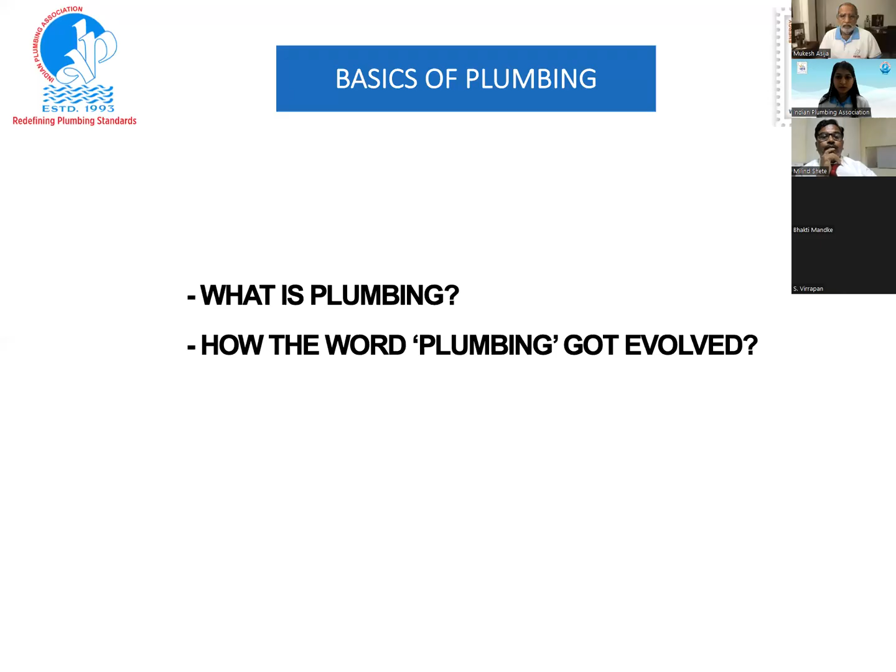One minute, let me just start this. Is my screen visible? No, Mukesh ji, not yet. Not yet. Okay, one minute. Is it visible? Yes, it's visible. Perfectly visible. Okay.

Young budding engineers, you know what is plumbing? A very simple definition of plumbing is it's a set of pipes and fixtures installed within a building. Please mind my words. Within a building, to supply the required quantum of water of desired quality at optimum pressure, and to collect the used water and convey this used water to a disposal point outside that building. This is what plumbing is. And the safety of the user is the essence of plumbing.

When you are supplying water through a plumbing system, it is for the safety of the user. And when you are conveying and or collecting the used water to a disposal point, again, the safety of the user is of prime importance, that it doesn't leave any kind of nuisance.

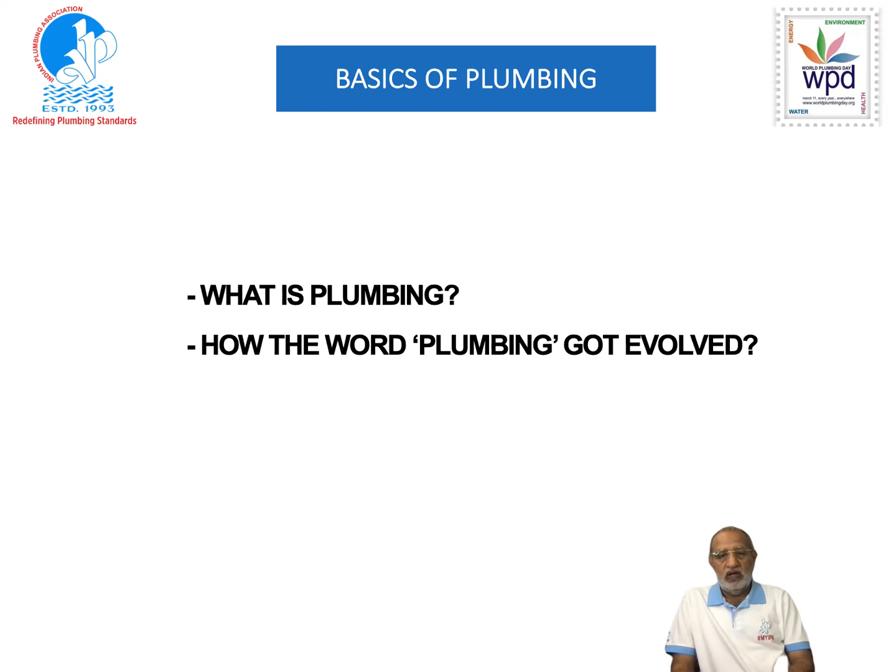Now the plumbing can be divided into two subdivisions. These are the logical subdivisions. One subdivision is water supply. We use that supplied water for the purpose for which it has been supplied. Once the water has been used, it has to be drained. So the second subdivision of plumbing is drainage. In between is the human being or any process which is using that water and converting it into leftover water, into used water.

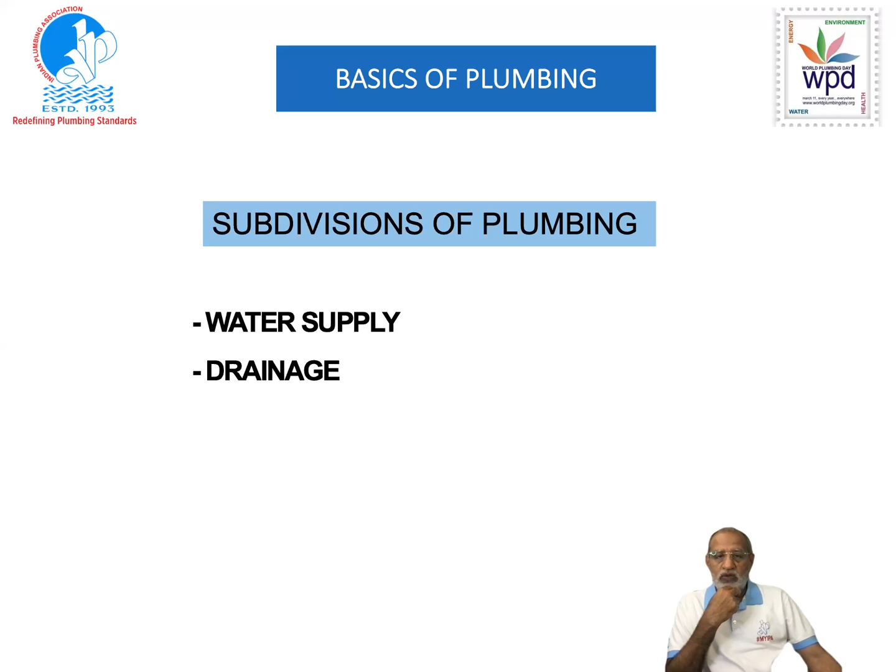Now, when we start with the first subdivision, water supply: how much water is to be supplied? Then, from where that water comes or may come. Perhaps the water we are getting is not fit for consumption directly, so you have to do the treatment. That water may not be available throughout the period of your usage from the source, so you have to store it. Then you have to provide a mechanism of distribution, and finally, a system of dispensing from where you draw the water and use it.

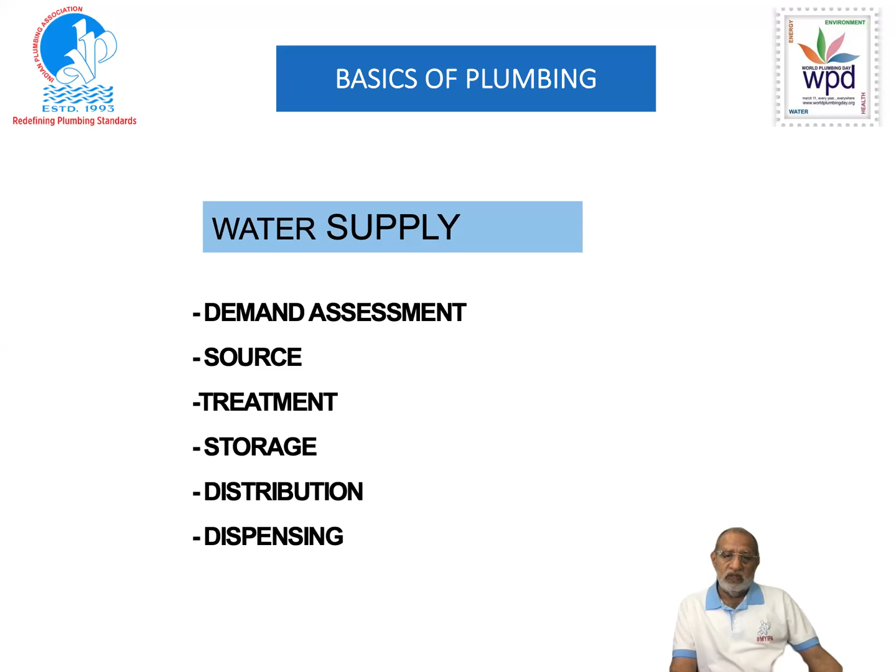Similarly, over a period of time, by collecting the data, these scales evolved, and many of these scales are now available in the codes. So when you assess the water, depending upon the purpose of that assessment, you refer to the codes where many of these scales are mentioned for different kinds of occupancies, or you try to understand the process, like the rice making example I have given, and then work out the consumption pattern. So this assessment of the demand is the first step.

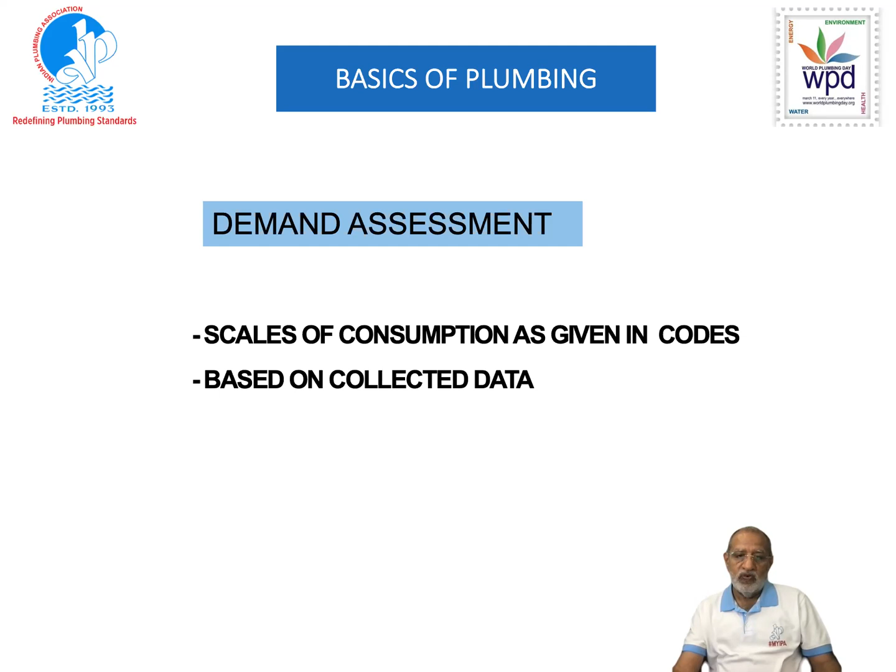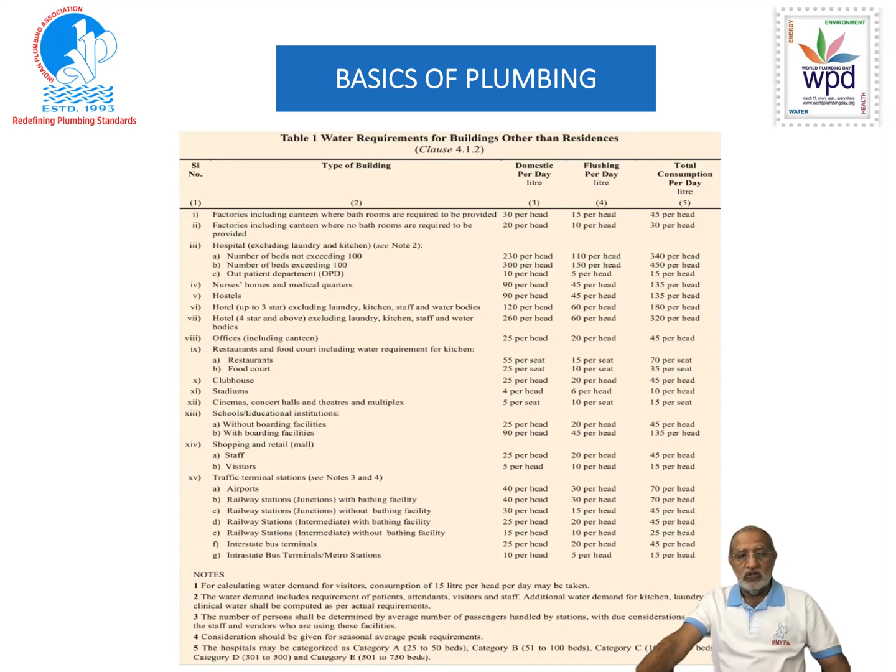Now, for example, when I say you have to refer to the codes, this is a page I have taken from the National Building Code, where different kinds of usages or types of buildings are mentioned, and the scales of consumption on the basis of per head, per resident, per bed, per seat are mentioned. So on this basis, when you know how many occupants or users would be in a building, you refer to these codes and work out the total expected demand. Once that demand is worked out, you provide for the other systems accordingly based on that assessment of the demand.

Demand you have assessed, but from where to get that water? For that, you must understand the hydrologic cycle or the water cycle. See, water on this earth is limited. Only thing is, it keeps on changing its form from one form to another form.

We have a lot of water bodies, including sea, from where the evaporation takes place. It gets condensed. Then there is a precipitation in form of water or in form of snow. That water, the precipitation in form of water, flows down through the naturally formed or man-made drainage systems or over the surface, and then comes back to a collection area, or it gets infiltrated into the ground depending upon the quality of the surface.

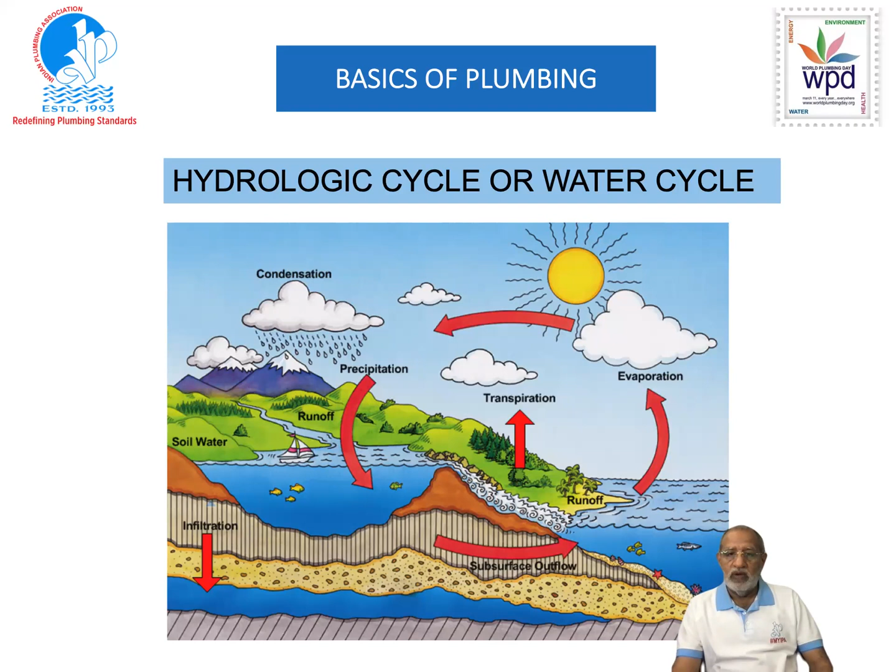Now coming to the sources of water, as you have seen in this hydrologic cycle, we have sources like rivers, lakes or ponds, and sea. These are classified as surface water sources because we can see the surface of that water. The other source of water is subsurface water, the water which has got infiltrated into the ground. So to draw that water, we have to drill the bore wells or the tube wells.

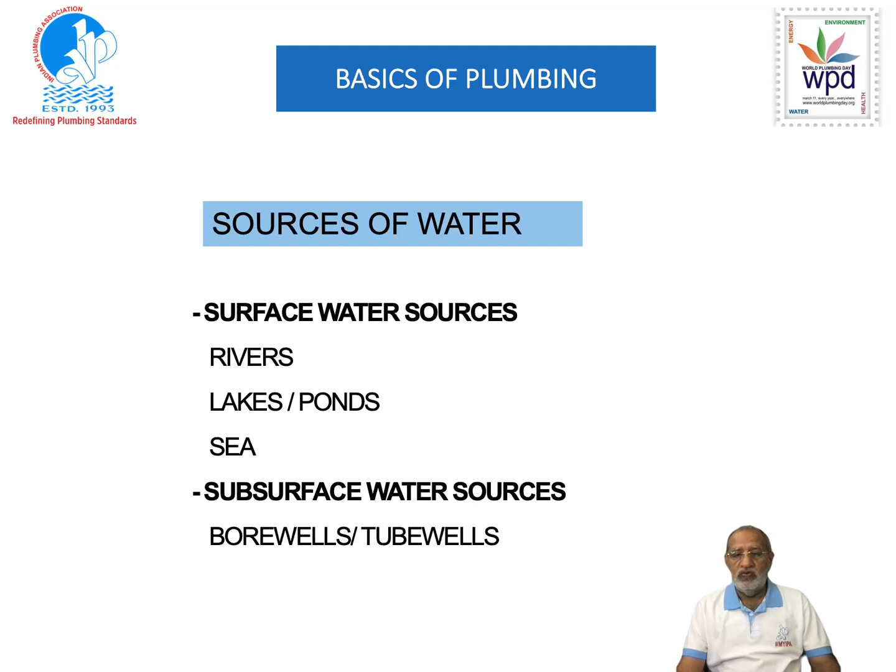So once we have identified our source, or if a source is available to us, depending upon the quality of that source, we have to treat that water. That water source may be pristine, perhaps you don't require any treatment. Like if you go up hills where habitation is very less and water is flowing crystal clear, you can drink it right from the river itself. It doesn't require any treatment.

But then, because of the habitation, increase in population, the way we use it, or because of other characteristics of the surface runoff which is going into our water sources, impurities do come into those rivers, lakes. So we have to treat that water before we use it.

Now these impurities are of three types. Physical impurities: water may be having floating waste material, can be just twigs, leaves, paper. It may be having physical impurities which have settled down at the bottom of your water source, or it is in a suspension form. It may be sand, it may be silt, or any other material.

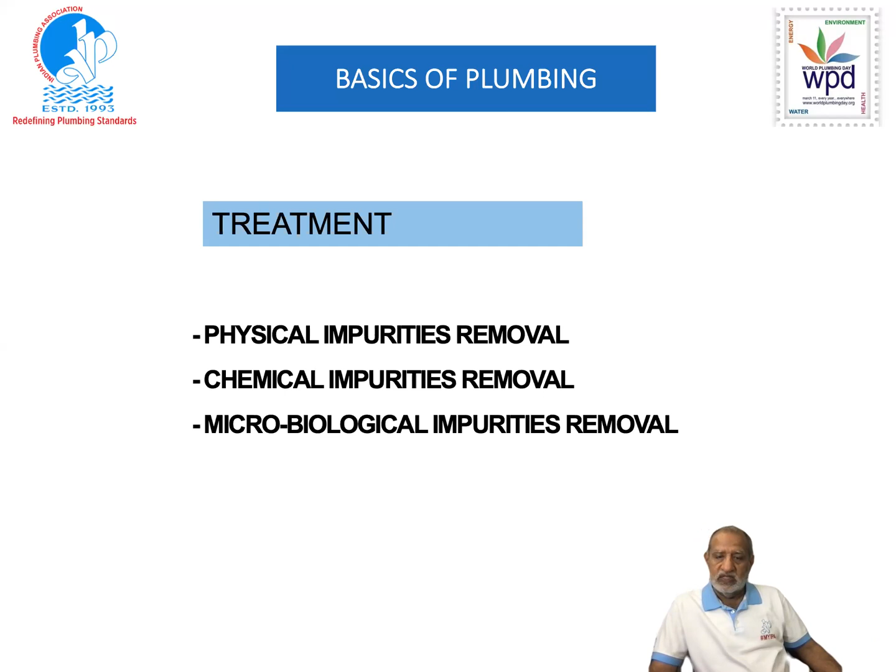So today let's have an overview of plumbing and the concepts of plumbing. So let's move to the next point. Once the water has been treated, most of the time it needs to be stored. Why is it to be stored?

If I am staying at a place and a river or a stream of water is flowing next to my house, and I know that it is a perennial river or stream, with water 365 days a year, I can draw water any time of the day, any day of the year from that stream. I need not store it. But this doesn't happen everywhere and for everyone.

When the source is limited and it is not close to us, water has to be conveyed to us through some other means, through pipes or tankers. So we have to store the water for the time when there is a disconnect between the source and our requirement. That is the purpose of storage. That storage can be underground, above ground, elevated, or a combination of all these, depending on how and from where we are getting the water.

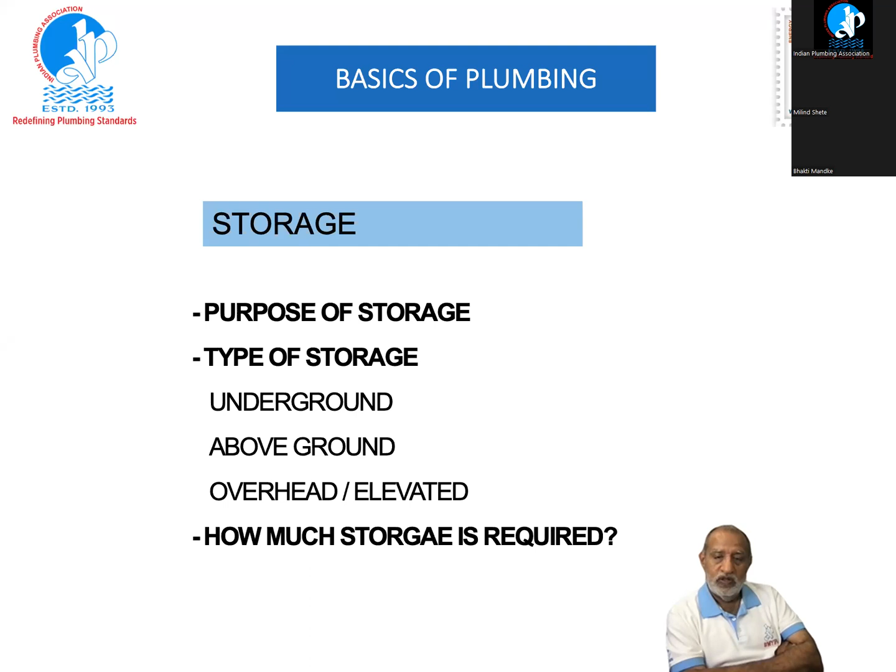So what will those 20,000 people staying in that campus do during those 40 days? So their storage requirement would be very high. So they have to make arrangements for creating that kind of storage within the campus. So that is how the storage capacities are calculated. Of course, there are some thumb rules, there are some norms, but for each situation, one must evaluate whether I require this much storage, will it be sufficient?

Now take the case of a hospital. There are patients. Suppose there is a breakdown of municipal water, groundwater is not there. You cannot ask patients to leave the hospital. You cannot ask them to bring water from their house. So then in a hospital, the recommended storage is much more than what is there for a house or for a residential colony.

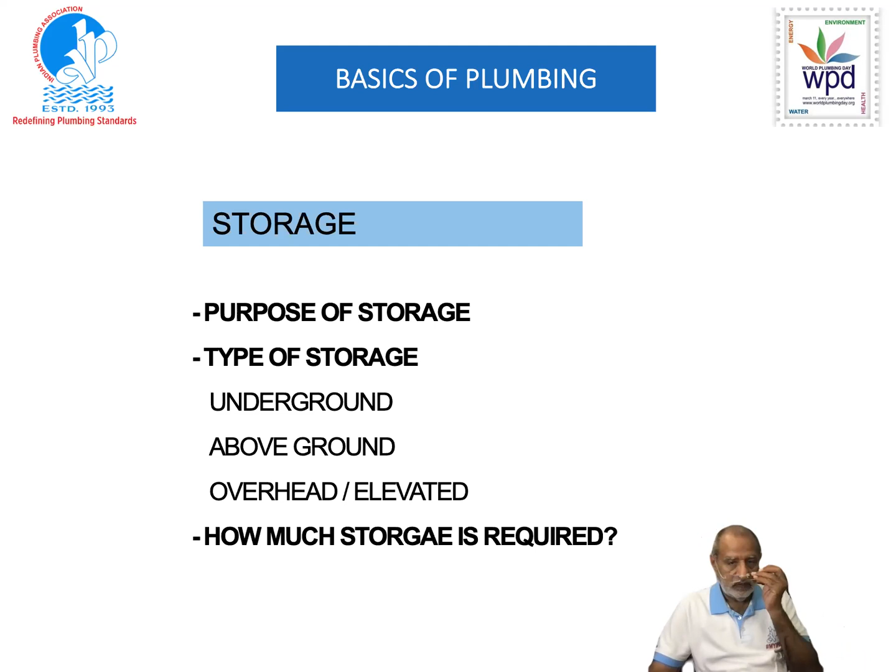Then, once you have stored the water, but before you use it, water requires a kind of conditioning as per your requirement. That can be a quality conditioning. Of course, you have done the treatment, you have stored that treated water, but for some purpose, it may require further conditioning. The water which you are getting from the municipality or from another source, suppose it was having physical impurities which you have removed. Water is fit, and you have handled those microbiological issues also. So water is fit for general consumption.

But now you want to enjoy a cup of coffee or tea which gives you a true taste of that coffee or tea or any drink of your choice. And that water which you are having has got certain salts which always add to the taste of the brew or whatever you have cooked. So naturally, to make that water taste neutral, not neutral in the other sense, you will have to remove those dissolved salts.

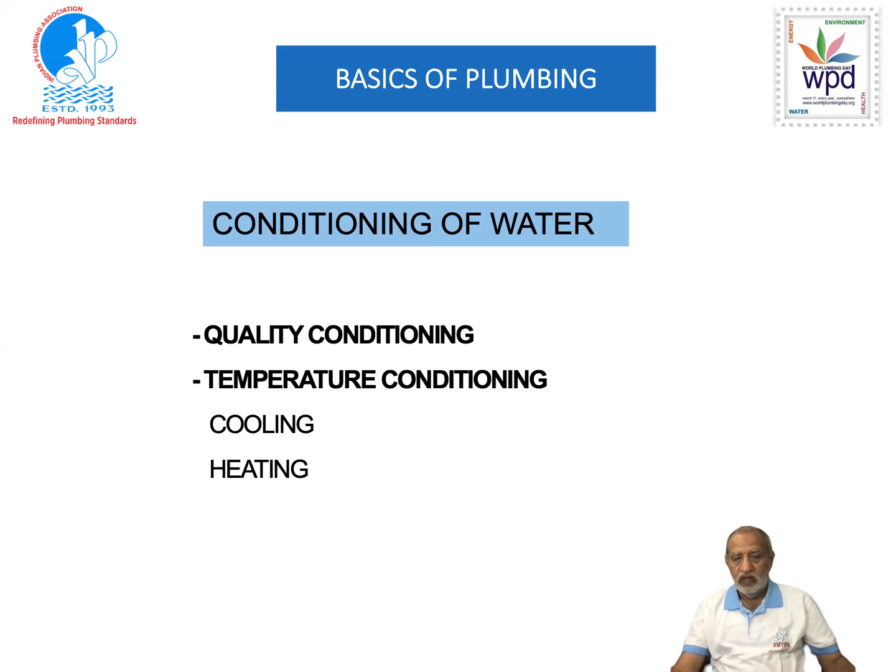Now, after the water has been conditioned as per your requirement, it needs to be distributed. Now, when we say distributed, it can be direct to the point of consumption. Like I told you, suppose you are staying in a valley and you are getting water from an elevated reservoir. It may be a man-made reservoir or a natural lake which has been tapped. A pipeline or a channel has been created, bringing the water to the valley where your house is. You have tapped that pipeline or channel, connected it with your tap. You open the tap and you get the water.

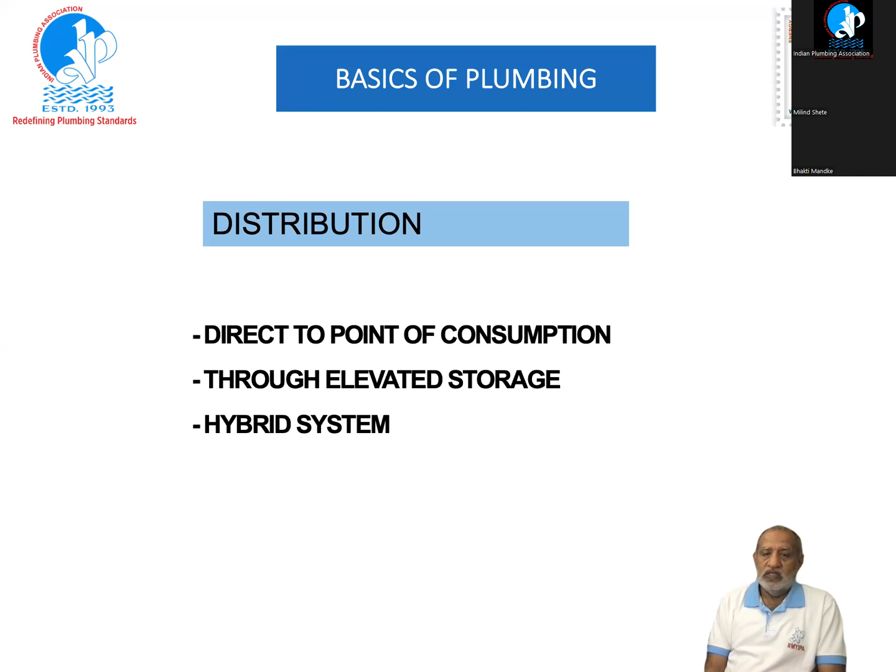Similarly, if your municipal system is very efficient, you know that water is available throughout the day, 24/7. You have connected your system with the municipal system, you open the tap and you get the water.

But when that is not the case, you have to adopt other systems. You have to first store that water in an underground tank. From that underground tank, if you are staying in a multi-storey house, you have to supply and serve all the floors above. So either you construct an elevated storage on top of your building.

First, pump the water to that elevated storage, and then under the gravity head, you feed the floors below. Or you have a choice: you put a pumping system which starts and stops as per demand. You open the tap, you get the water, that drops the pressure in the line. It is sensed by the controller of that pump, and the pump starts, and you keep on getting the water.

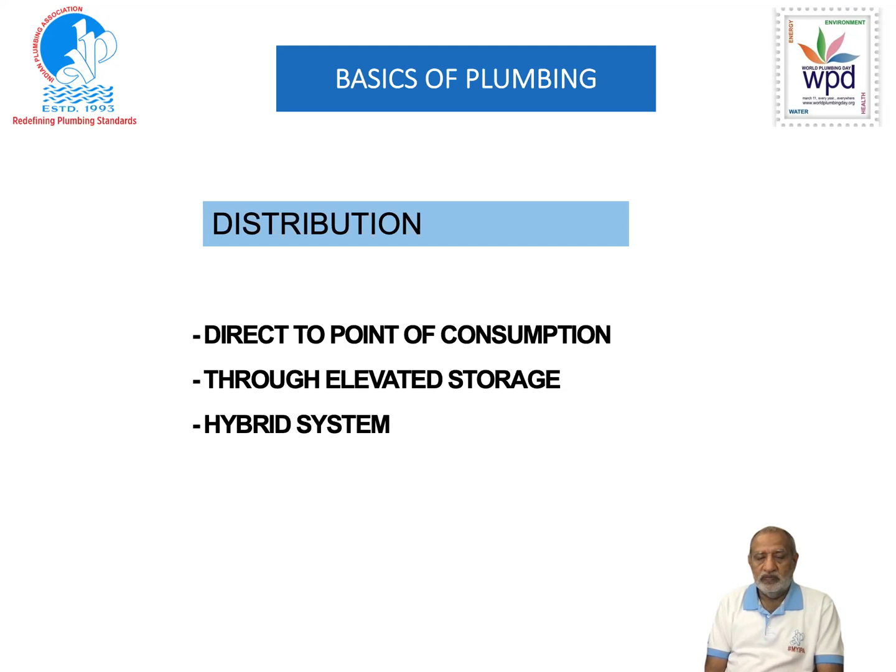Then in the water supply subsection, the last point is the dispensing of water. You have distributed the water through pipes, but then you have to dispense it, ultimately from where the user draws the water from the pipelines. A number of types are there for these faucets.

Some faucets we require for our daily needs, like we use at our homes - manually operated, you open a tap, or it can be a shower. Then in public places, the taps are provided with sensors. You take your hands closer to those faucets, it starts giving the water. You walk away from that faucet, it stops automatically.

Or you might have seen or used faucets which are called metered faucets. That means in each operation of that faucet, a limited amount of water comes out. Those are called metered faucets. You would have used these in public places to reduce the wastage of water and to limit the usage of water.

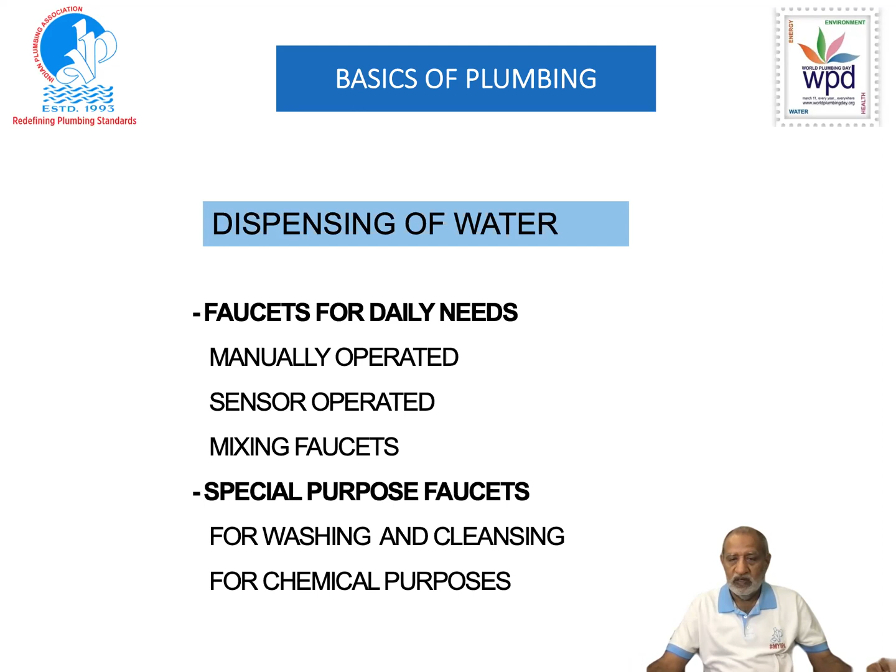Am I running? How much time do I have? Hello. Sir, we started late. Yeah, I know. You can take another 5 or 10 minutes maybe.

Okay, now the first subsection, I have already touched upon all the points. Now the next subsection is the drainage. Once you have used the water, and it has passed through all those things I just touched upon - sourcing, storage, distribution, conditioning, water treatment, dispensing - once you have used it, it becomes used or dirty water. Now we have to have a system of collecting that used water and conveying it safely without creating any nuisance, to the disposal system outside our building.

So drainage systems within a building are of two types: one is underground and another is above ground. Underground system, when we say - in earlier times, not now popular, neither permitted by the municipality - so it would go into the same system as your used water.

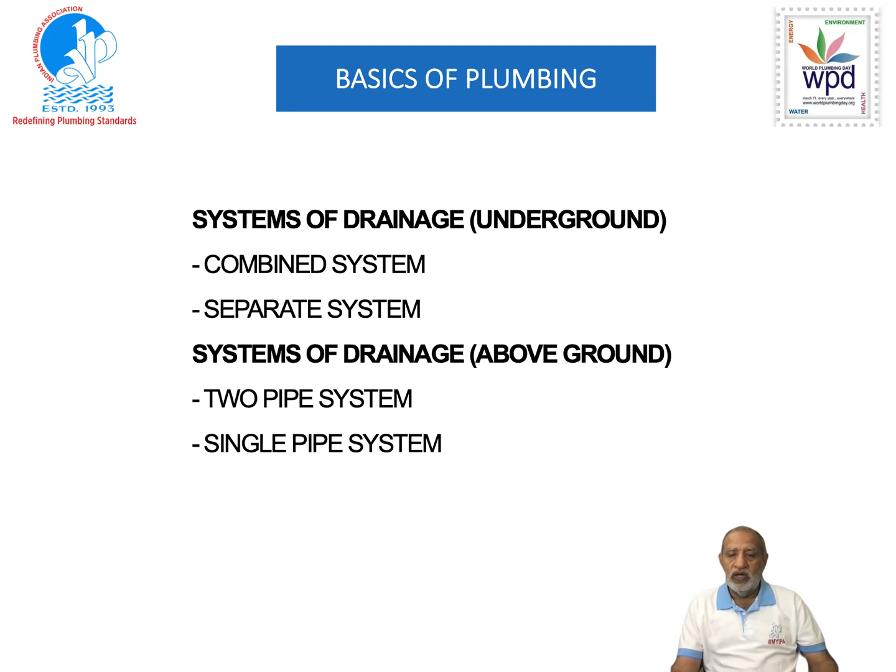Now the question comes, when you collect the used water connected with the outside drainage system, how do you prevent the smell which is there in the outside drainage system? All of us experience, whenever there is wastewater flowing, when you pass through drains, or if it is a pipe drain, its manhole is open, it emits a lot of foul smell. But why does that foul smell not come to our toilets? So a major and the most important component in the above ground drainage system

is a contraption called a trap. This trap is a contraption which holds water, which acts as a seal, and that seal prevents back passage of air from the sewer to the inside, but at the same time allows flow of used water through it for discharging into the sewer. I can show you some of these, how this trap looks like.

Is this visible? Can someone tell me whether I am able to display it? Yes, yes, yes, sir. Mukesh, you are able to display. You are able to display. Sir, a request to just speed up a little bit because we should not get too late. Okay, okay, okay, what I should.

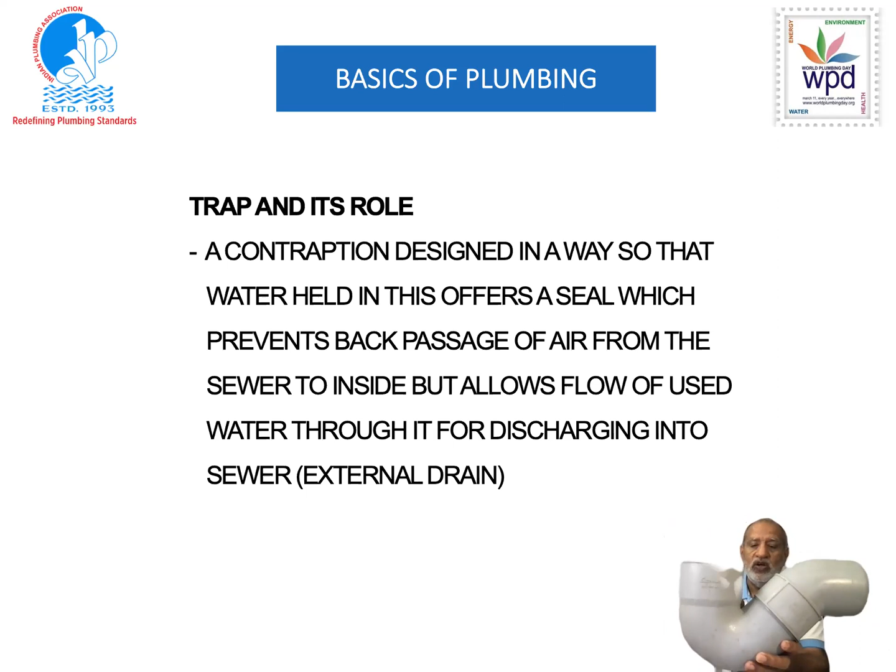So thank you, this is one type of trap. You put the water, it remains up to this level, and this end is connected with your outside drainage system. So whatever foul gases, foul smells are getting generated, this end is within your toilet, so that foul gases, foul air can't come as long as you are able to maintain the water seal in this.

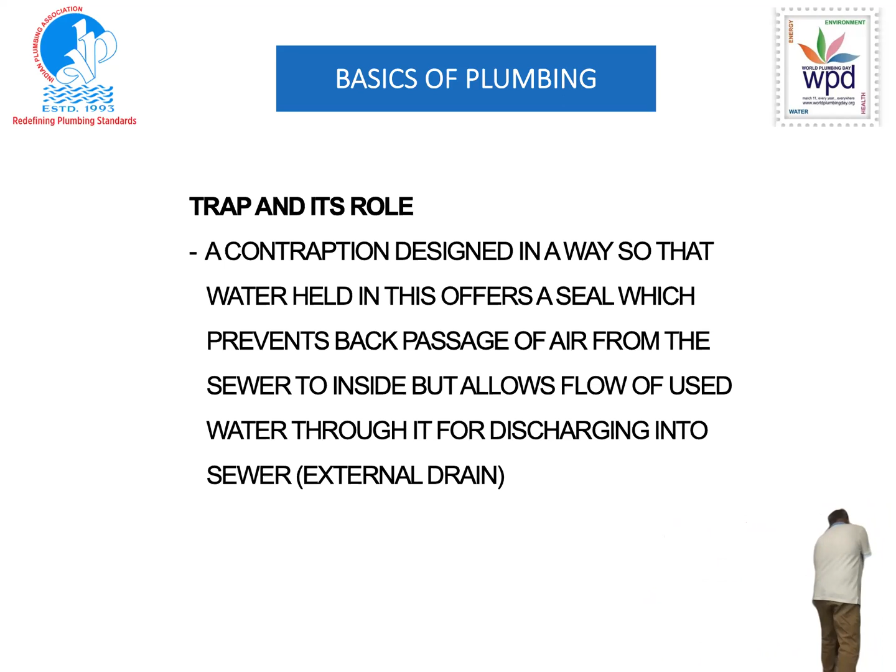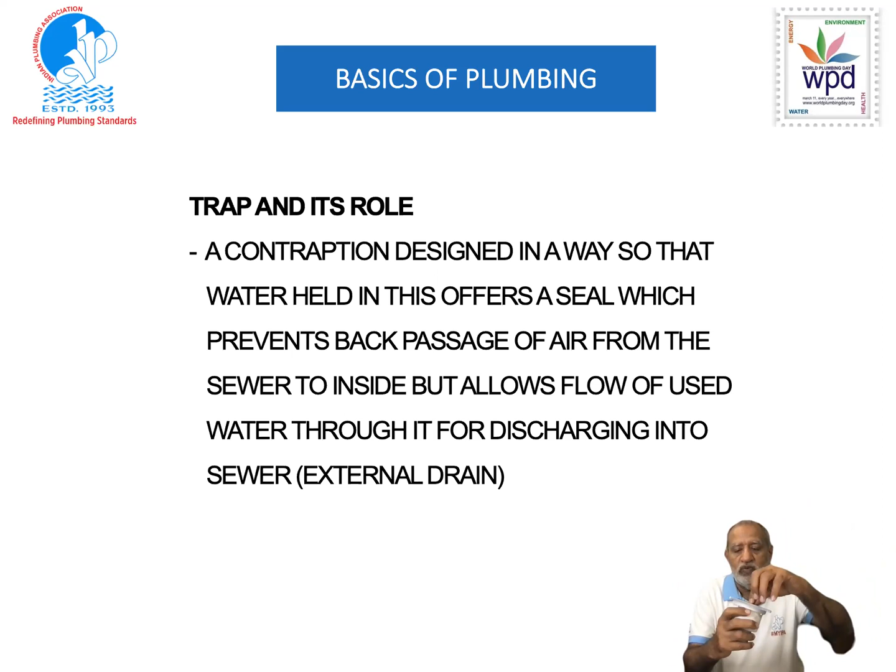There are other forms also of this. The one which I showed you is a horizontal type. Now, if you see, this is a vertical one. In this, that water seal gets formed because of a vertical system. So all this information you can see in the codes, in the textbooks and other literature which is available.

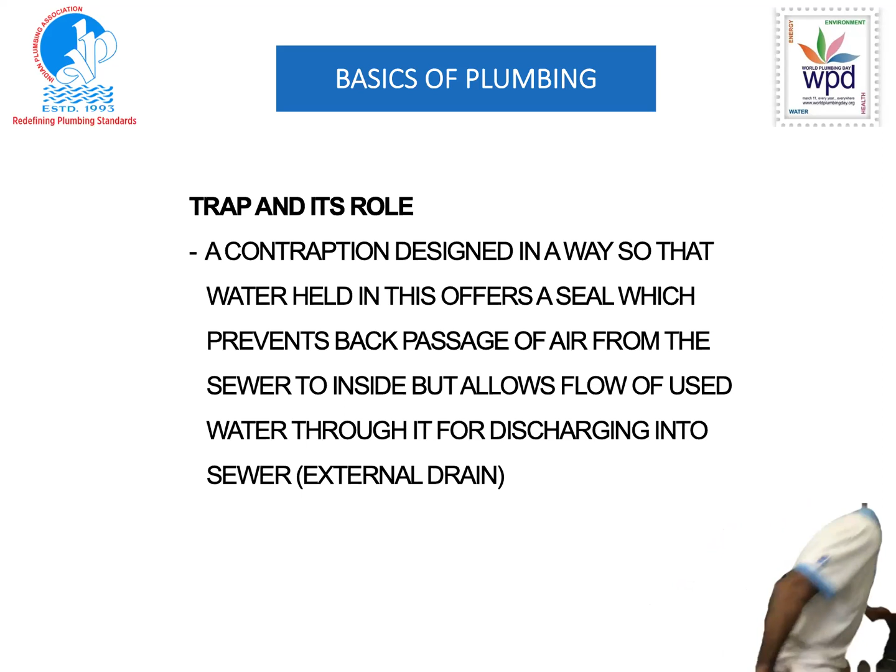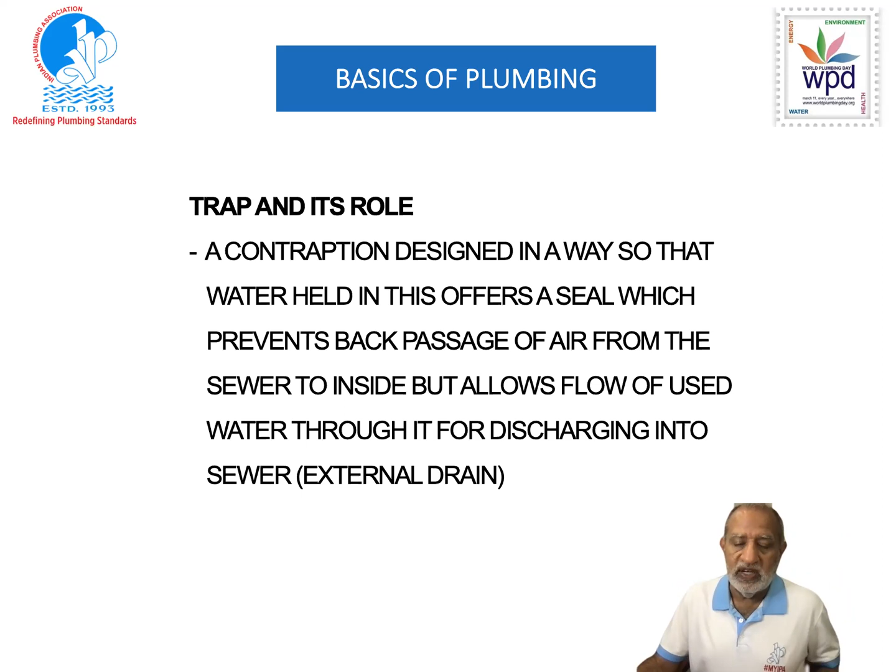Next point in the above ground drainage system which is of importance is the venting. See, when we know that foul gases do get formed in the system, those are to be taken out from the system, so venting does that purpose. Second thing is, in the above ground drainage, we know the pipes don't flow full. It's a mixture of water, solids and air. And when the whole thing goes down under the gravity head, a pressure imbalance gets created in the pipelines.

Now, to maintain that pressure, the system venting is to be done. If this system venting is not done, the trap which I have shown you, which is preventing the foul gases and smells coming from outside to your toilets, that water seal gets sucked, because the mouth of that trap or the inlet in your toilet is at atmospheric pressure. And if a subatmospheric pressure gets formed in the pipeline downstream of that trap, it will suck that water seal from the system, and the water in that trap will come down, and it will create a passage for the foul air, foul gases, foul smell to come inside your toilet.